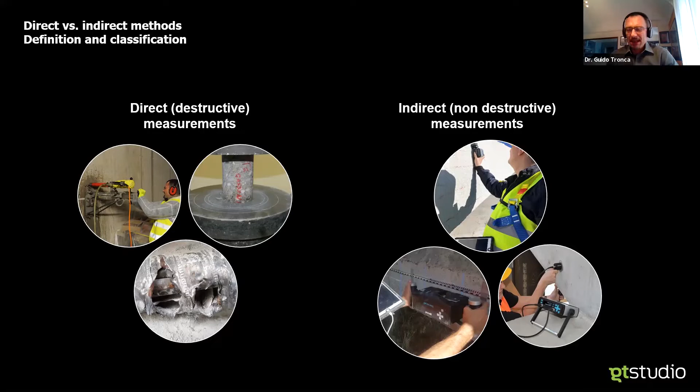Old school method for finding reinforcement and PT ducts: breaking, visual inspection. Other ways of doing it. Is there a better way? Are they outdated? The answer is no, basically. There's no point in being a partisan of one team or the other. The key point for a professional, for an inspector, is the best combination of both in order to extract the maximum amount of information.

So if I should point out some key features of one family versus the other, I'd say that a direct traditional measurement measures directly the quantity I'm interested in, and normally I destroy a sample for doing that. While the non-destructive or indirect approach focuses on measuring a related quantity somehow correlated with what I'm looking for.

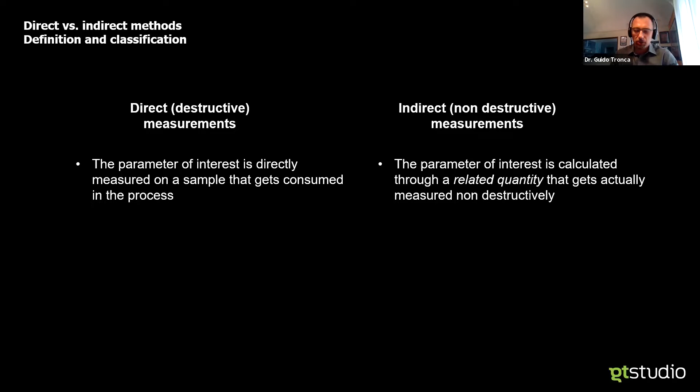By definition, a direct measurement is typically certain, calibrated. It can have a certificate with a huge number of decimals behind it, making you certain that the quantity is measured. While with non-destructive testing, we are rather dealing with qualitative or comparative information.

A key limitation is that if I test one point, if I break open one location, I have a full, perfect insight of that specific point. How can I be sure to extend that insight to the whole structure? That is the role of NDT.

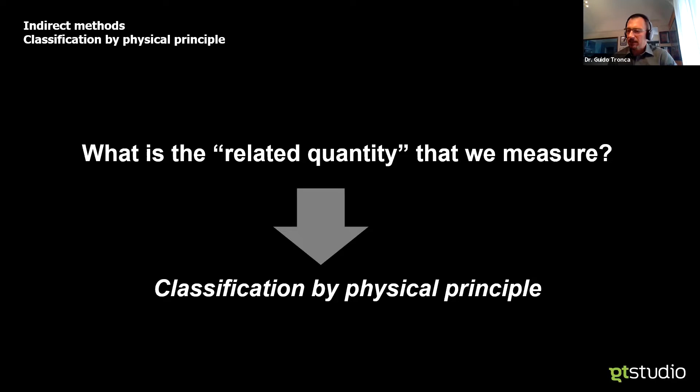We mentioned that there is generally some related quantity that we measure, and that basically defines the measuring principle of each measurement. So as a short classification by physical principle, I just prepared a couple of qualitative slides.

Electromagnetic waves analysis is a very technical term, but it collects a number of different measurements, among which the first and most important is visual inspection. A good inspector keeps his eyes open; you have to really provide a subjective judgment on a location. If I shift myself from the very narrow window of wavelength that my eye allows, I notice I can shift toward X-ray analysis or lower frequencies.

I'll enjoy thermal camera and infrared inspection, or even lower frequency with GPR. All have this basic principle in common. If I keep an eye on the sonic waves, there's a whole world of testing that can be done.

And we concrete guys are strongly related to the metal guys, who use similar principles with very high frequencies. You play by seeing how your body reacts and responds to a sonic impulse. It can be very high frequency, or this average frequency that is our bread and butter in concrete when we measure ultrasonic pulse velocity, cross-hole testing, pulse-echo, and so on.

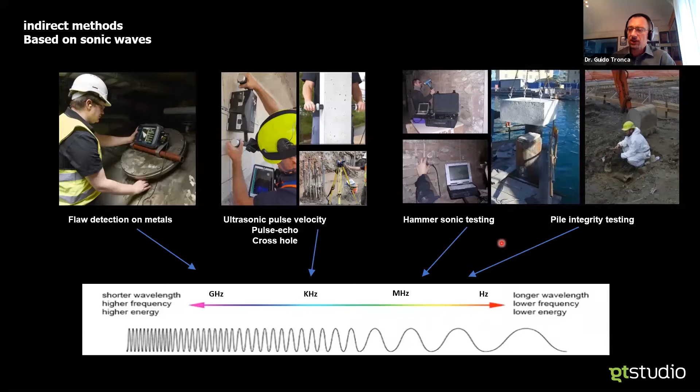Other methods are typically electrical in nature, and we'll see that especially for corrosion. Electrical processes need electrical tools. So this is our electrical toolbox, where we find rebar location, induce currents, or measure potential, resistivity, polarization resistance — electrical quantities.

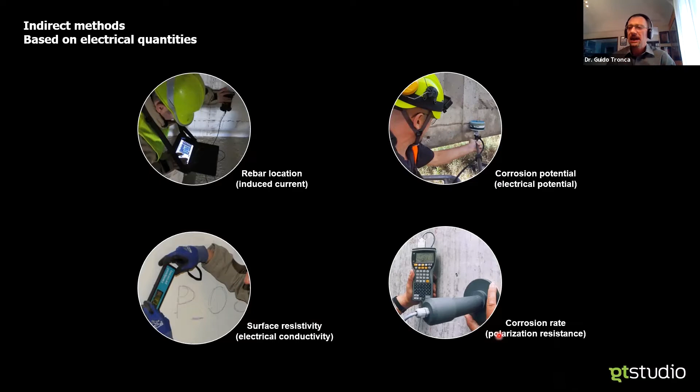And in the last box, I put the mechanical quantities. I can measure rebound, the hardness of a structure, or even for metal, measure the amount of energy that is transferred into the body.

So we're measuring a rebound distance or rebound velocity, or we can measure the amount of penetration a specific probe can reach when projected with a given energy into the surface, or the force needed to pull out a specific insert. In all these cases, we're dealing with a mechanical quantity related to the final quantity — concrete strength, in this case — to be measured.

Okay, so this is just a warm-up, but probably more interesting is a classification by application. Now we'll be picking up from the different boxes of physical principles the tools we need for our specific purposes today.

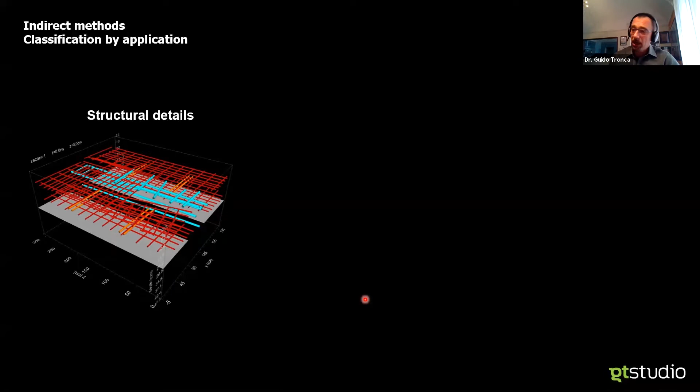Specific purposes we'll be talking about are structural detail, in broad terms, for highlighting geometry and even embedded objects and defects of a given structure. A key point for a structural engineer is the estimation of concrete strength, and for durability and service life estimate of a structure, the corrosion investigation. Let's dive in with the structural — some of the measurements we'll be talking about today.

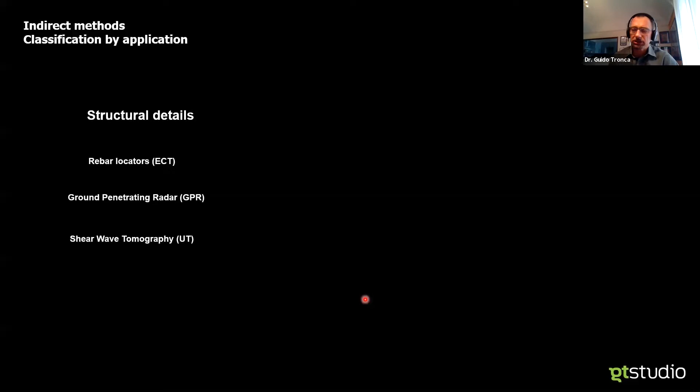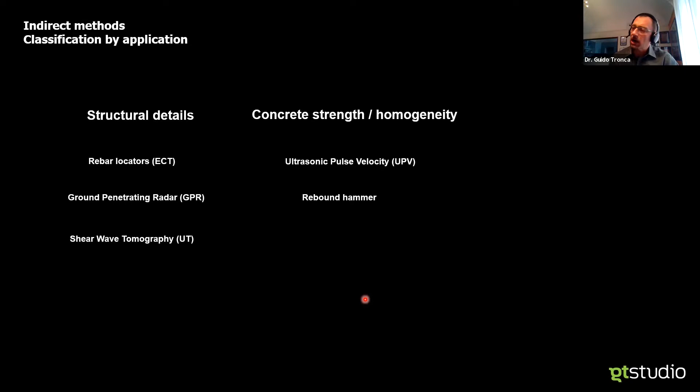So we'll be talking about rebar location, ground penetrating radar, and shear wave tomography for structural details. Then I picked the two most important ones at global level for concrete strength, which are hammer testing and ultrasonic pulse velocity, and some mention of the electrical method for corrosion.

So let's start with the imaging technique, structural detail assessment. All these techniques provide an image, a visual insight of what's inside an object. Let's start with a general overview of all three of them.

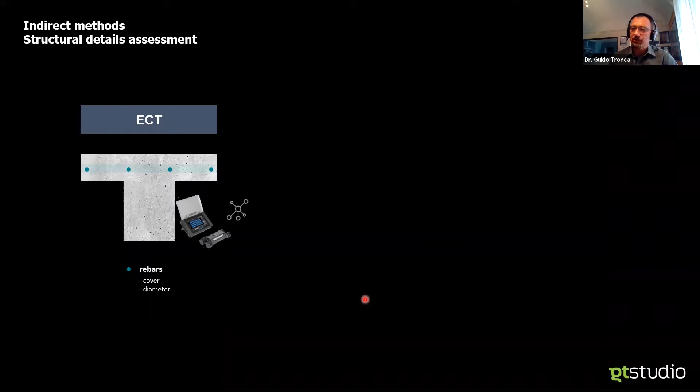Rebar location is the gold standard for steel rebars, typically accepted for measuring accurately cover and estimating diameters. We'll be touching the ground penetrating radar, its key feature being the most versatile locator. It extends locating capabilities not only to steel objects, but to metal, plastic, and voids also. And the most recent technique is ultrasonic tomography, UT, a very specific application, very promising and ramping up in the world of non-destructive testing.

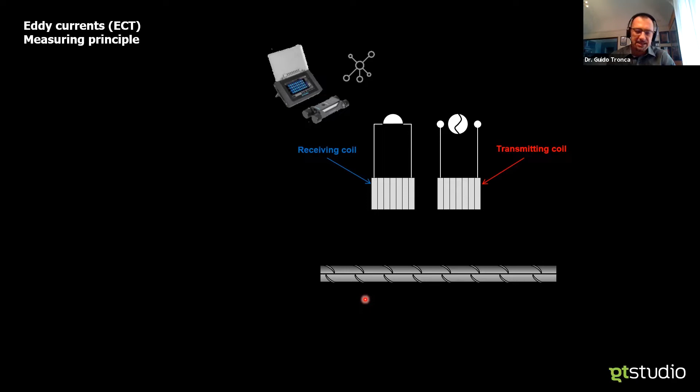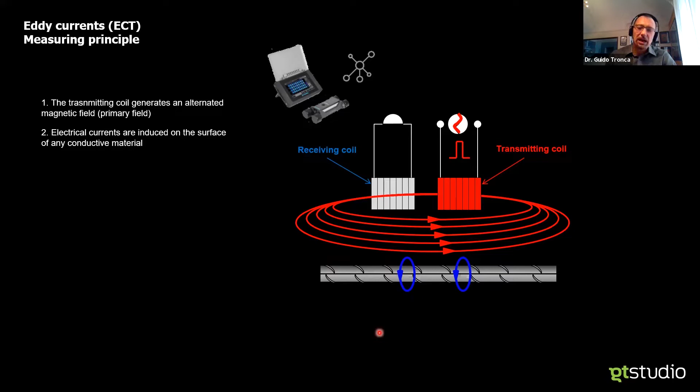A very short insight into the measuring principle of any rebar locator. All manufacturers have different arrangements of the coils used to investigate steel, but the basic principle relies on a transmitting coil where current is driven to generate a magnetic field, which induces surface currents onto any electrical conductive body. So we are specifically dealing with conductive bodies, specifically ferromagnetic conductive bodies.

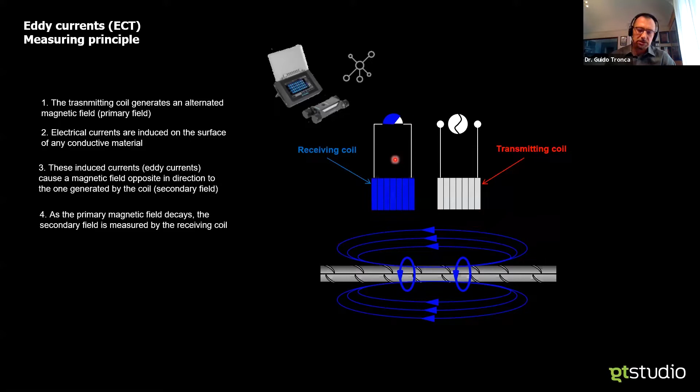When an electrical current runs over an elongated object, a secondary magnetic field is generated. This is the quantity, in terms of voltage related to the induced magnetic field, that is measured. Quite a complicated measuring principle, but what we care about as NDT users is that this measured energy is related to concrete cover and rebar size, and both can be separately calculated.

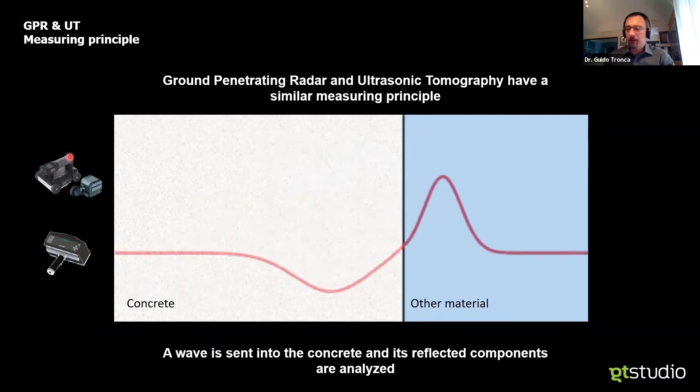If we move to the other two partners of concrete imaging, both have a similar acting principle. They are both based on shooting an impulse into the concrete and listening to its reflected component. The main difference is that a ground penetrating radar will shoot an electromagnetic wave into the concrete, while the ultrasonic tomograph will induce a sonic shear wave impulse. These two kinds of energies respond differently when they meet different interfaces.

The key point to remember, which has a dramatic effect on the strength and limitation of each, is that when I shoot an electromagnetic wave, it will partly pass a concrete-air interface, while it will totally bounce against a concrete-steel interface. When I play with ultrasound, I have to expect an inverse behavior: all energy is reflected against an air interface, and part of the energy will pass through a concrete-steel interface. Now let's keep in mind that the amount of information I extract is related to the component that bounces back.

That brings us to the main differences between the two. Steel is the natural target for GPR, hence it will be extremely accurate in defining every steel object, not only but mainly steel. Air is not a barrier for GPR, hence we can investigate through air. It's a good thing, we can have our instrument rolling on wheels. If I have a small air interface, I can bring my insight further.

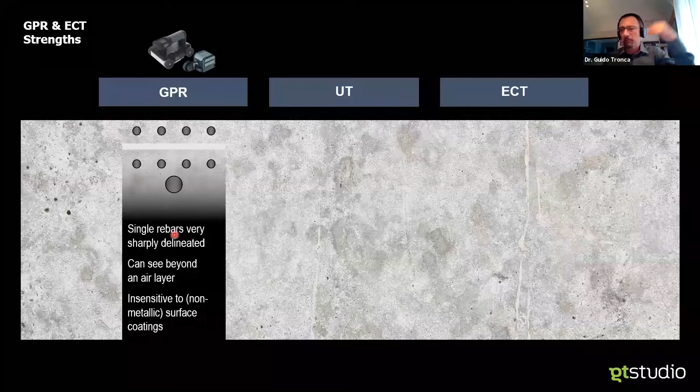If I play with ultrasound, we saw that this kind of energy, ultrasonic waves, tends to pass through steel. So it won't be as sharp on steel, but it will allow my examination to go further, even into dense rebar arrangements. You can even go past a metal plate and look for an interface behind it. Its natural target is air, so everything related to air—maybe the geometrical end of the object, maybe the smallest delamination, an air pocket, a honeycomb—it will be a natural target for ultrasound.

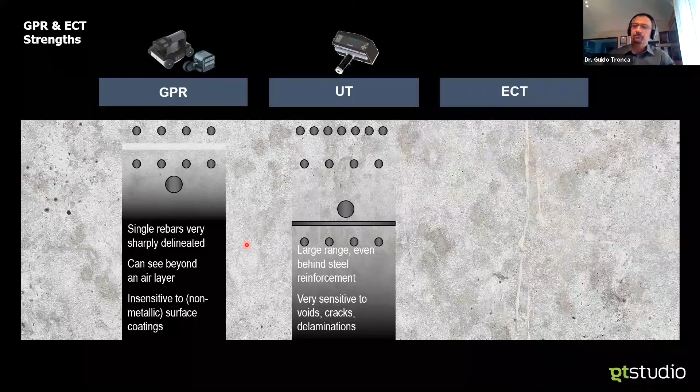For all these kinds of techniques, let's keep in mind that what I see best will make me blind behind—this will reflect later. Eddy current testing has the great feature of only looking at rebars, so it's totally insensitive to the material type. Typically, when dealing with GPR or pulse velocity, we have to take into account the material properties: is it wet, is it porous, how fast is the wave there? None of those complications exist when I simply use a rebar locator, because I only measure a specific target.

Concrete cover can be very precise, especially with modern instruments with compensation algorithms, and in fact it is broadly accepted as the number one methodology for verifying concrete cover. As state of the art today, it is the only approach I can have for estimating rebar size under lucky circumstances—not under all scenarios, but if there's one method that can guess a rebar size, it's an eddy current based rebar locator.

Now let's turn the medal and look at the other side. We said that GPR is a sniper for steel. If there is too much steel, I will easily not pass that barrier, and my information will stop. The energy will be highly absorbed by heavily congested reinforcement.

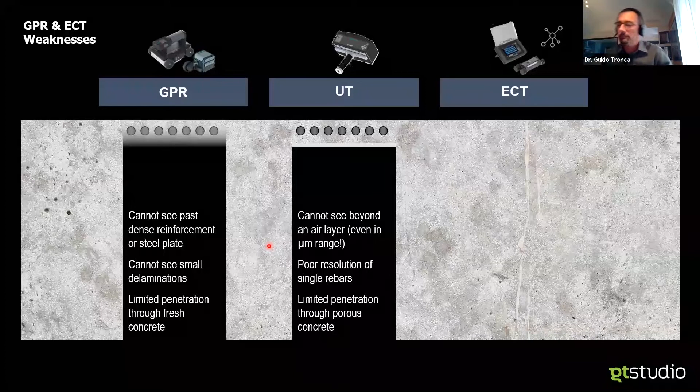Eddy current is basically limited in depth. We'll see some examples, but while high frequency GPR can reach up to 60, 70 cm of penetration, ultrasound can go past 1.5 meters, couple of meters in good concrete. With eddy current testing, we are very accurate, but we are talking about centimeters, 10, 15 cm, and only the first mesh of reinforcement.

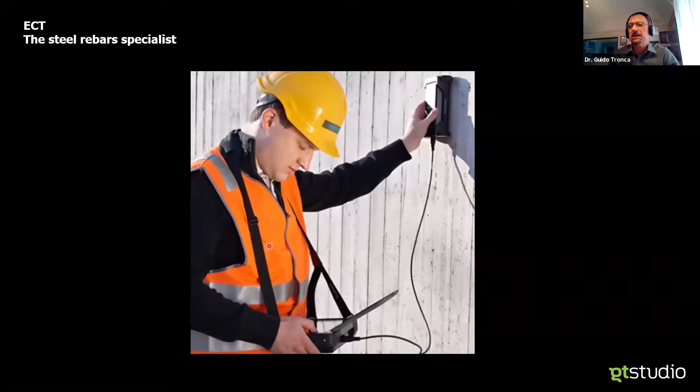Okay, let's see some of this methodology in action, and let's start with the first in order of appearance, something that's been on the market since the early 70s, I would say. No comparison between what those instruments could do then and what they can do now, but still, it's very often the number one instrument that every inspector has in its arsenal.

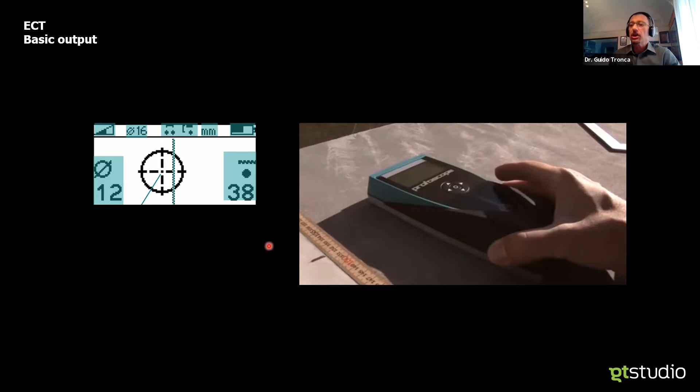The very basic output, you can find in entry-level instruments, is that when moved on the surface, they can easily locate the rebars, providing the location and not only spot measurement of a given cover and spot measurement of a rebar size. This is the entry-level rebar location that can be used.

And it is a central activity in all NDT inspection. Why? Because a key point of all NDT and traditional testing inspection is that you always want to know where the rebars are, either because you want to measure them or you simply want to avoid them.

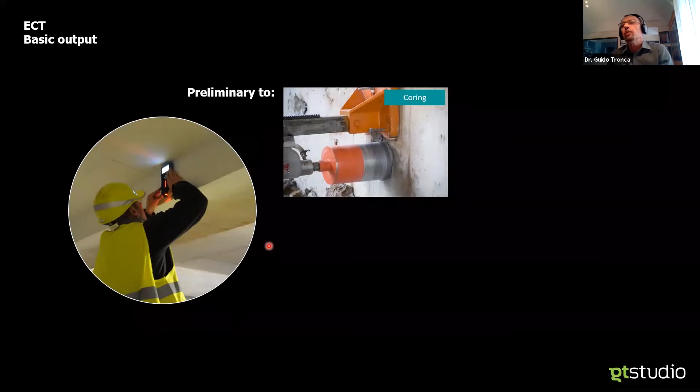Of course, you want to avoid them when coring and cutting the concrete, but you also want to avoid the effect they could have on the measurement when performing other kinds of NDT measurements, such as rebound hammer, such as ultrasound that is affected by the presence of rebars, extraction testing, you name it. Whatever you do on site with NDT, you'll always have to add at least a basic rebar locator.

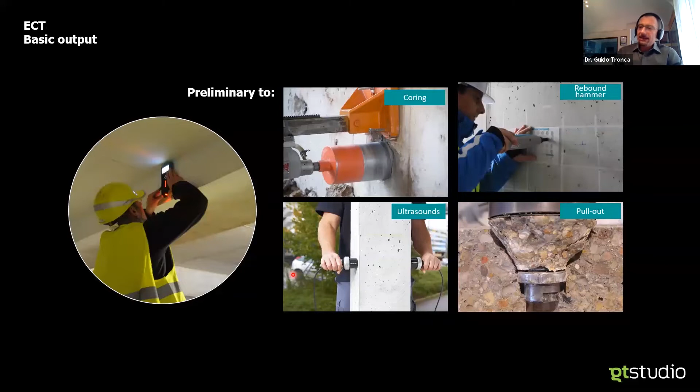But especially if we focus on high performance instruments, and let's assume you use an instrument with a wheel, like the profometer, for example, then you will see its real full potential for conformity check for cover. That is a mandatory check in many agencies or many general contractors. You want to check that the rebars have sufficient cover.

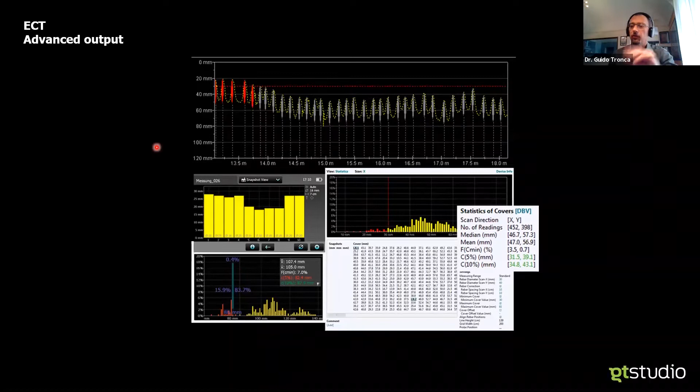Perfect. The instrument is optimized for running along huge paths, collecting the right cover, and performing on board or on PC the related statistics analysis, which enables the final user to say my cover is compliant with the drawn specification, or we have non-conformities on specific spots.

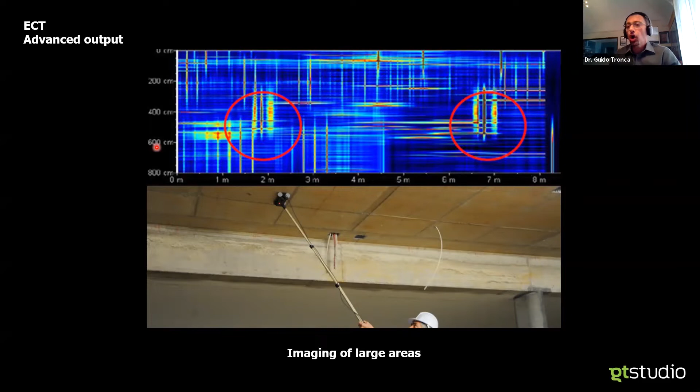These are typical reports that an NDT company could deliver when asked to perform rebar location on single objects: color-coded mapping in terms of cover or diameter. Just to give an overview of this.

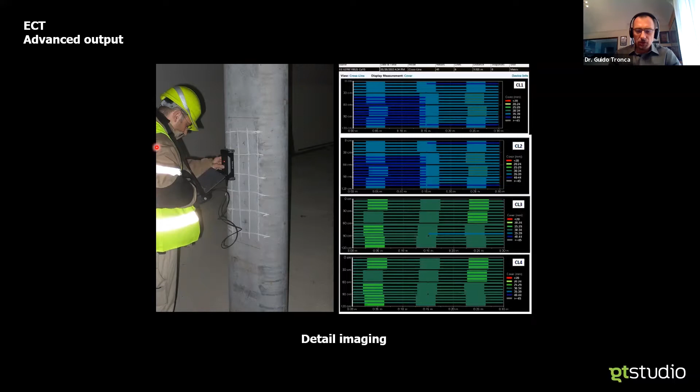But let's move one step further in time, and as years passed, we, the concrete guys, the concrete NDT world, stole a methodology that was basically born for soil investigation, hence the ground penetrating radar. If I should label it, the GPR is the ultimate locator.

Let's understand very shortly what you have in your hand when you use that. You have a device that you will roll onto a surface along a path. It will send its impulse while running, and it will measure an arrival time of each reflection. The measuring time or measuring distance, once we assume a given velocity, is then represented into an image shape.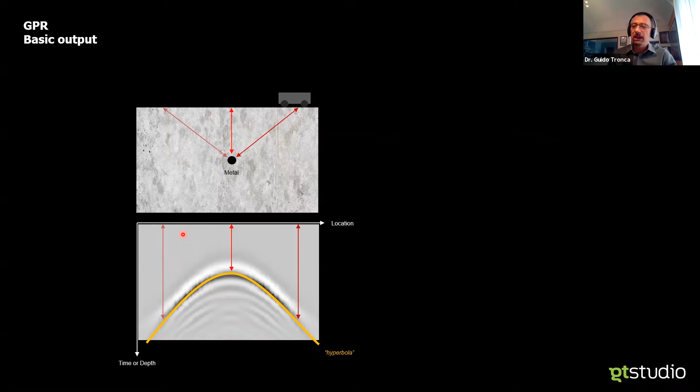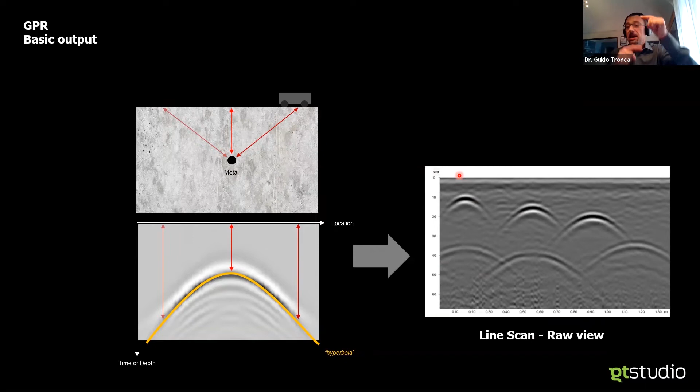So with GPR, we move from the simple numbers of a rebar locator to a real image that is typically in its native raw shape, recognizable by hyperbola-shaped objects, just related to the fact that the impulse is continuously measured. And also, it's the key reason why we can see multiple layers of objects.

Okay, this was a very simple case. Let's take a look at a real case of a reinforced concrete slab.

There are a few meters of scan. We can see the first layer of reinforcement, every single rebar in shape of a hyperbola, and the second layer of reinforcement at a given depth. The bottom of the slab, this was a 35 cm slab, and if I focus my sight on the bottom part, I can also see the supporting beam.

This scan I wanted just to use to give a first view of the very basic processing that is very common in the GPR world and is fully supported in the PROCEQ app, which is the migration. We basically take into account the velocity of the wave into the concrete, and we collapse those hyperbolic views into realistic dots.

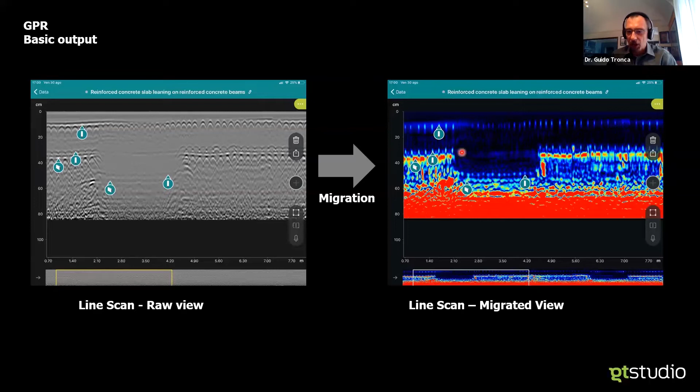So a migrated view is the closest thing to a real section of the object that I'm measuring. I can see dots where the rebars are, top of the slab, bottom of the slab, bottom of the beam, and all the shape of the element I'm investigating. But we can do much more than that.

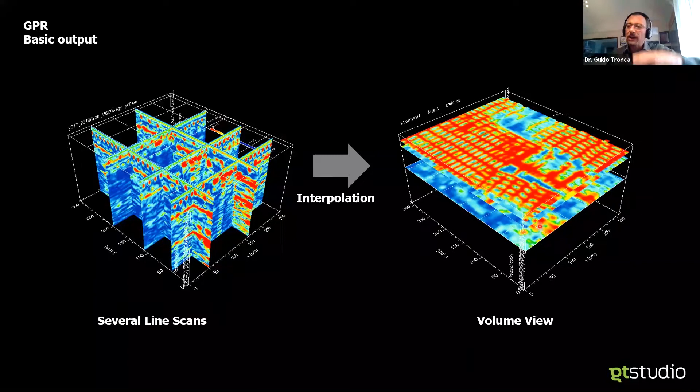Let's assume that we measure a number of those scans along typically longitudinal, parallel, and orthogonal scans. If I process those data combined and interpolate the empty spaces, then I can get to a full volume view that is typically sliced in time. So I move from a distance versus depth view to a more intelligible XY view at whatever depth I want to reach. And this was made fully available by PROCEQ.

This is a kind of processing that's been around for ages now, but I have to admit that PROCEQ was the first one to bring it and make it onto a very usable interface.

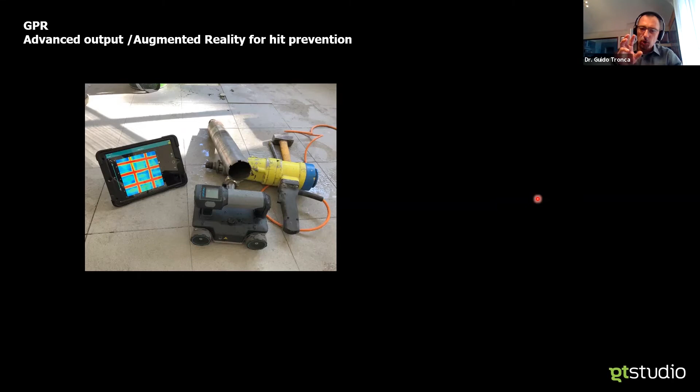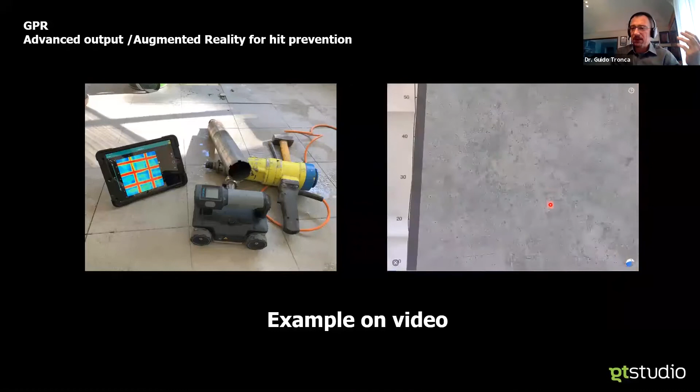So on purpose, I focus on this very typical application, which is hit prevention by means of GPR. You can see in this fast forward motion that if I scan a small area, the typical 60 by 60 is a good default, I can immediately have an overview, even if it's maybe complicated. In this case it wasn't crucial to estimate all the rebars and the exact reinforcement, but basically to avoid those. So let's collect all the scans that we need.

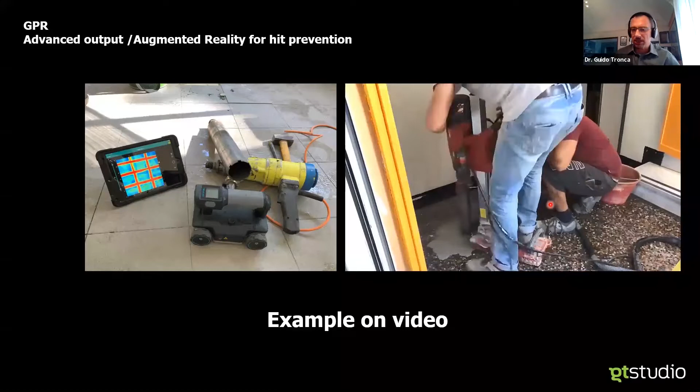Let's focus on the surface itself. Every strong reflector can be assumed to be a steel rebar, and within a reasonable time, I can estimate the right spot to drill a core. That is a very simple example where very high level technology, what used to be considered only high level technology, is really at hand for very practical applications, such as in this case, we can see a successful coring.

So I guess that was confirmed on site. Exactly. So good, successful hit prevention, simple case.

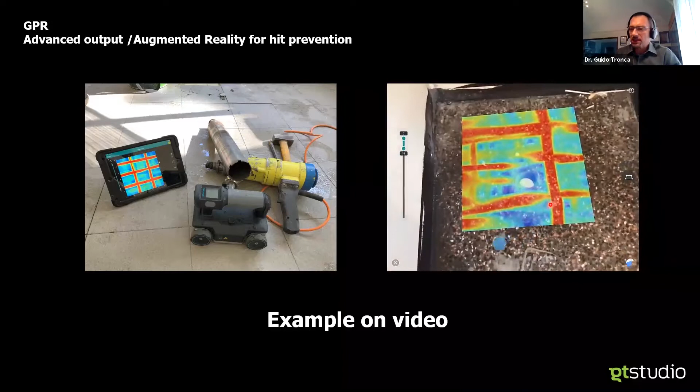Okay, moving on to just another short example of a more complex structure. This investigation was carried out on an old building that underwent rehabilitation. You could really see a mix of old typical structures such as masonry vault and arch that were later reinforced on some portions by metal reinforcement.

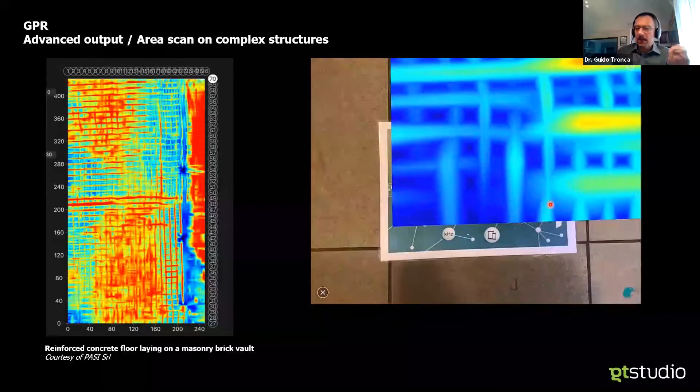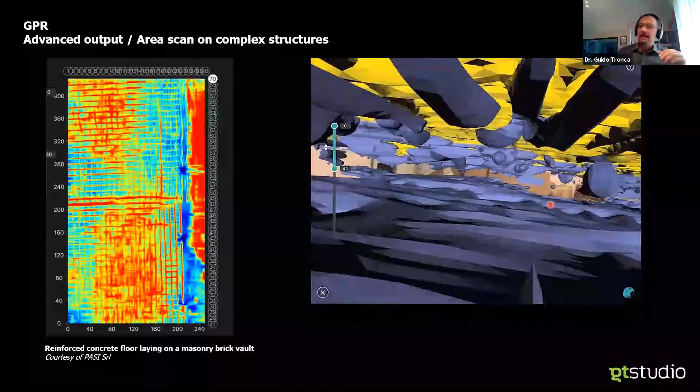This on the left is just a snapshot at the given depth. The full insight of the whole slab can be gathered by, in this case, a flexible area, so several meters were scanned. And in this case, the owner of the construction could really directly verify where there was the yellow upper metal reinforcement, and where the existing masonry walls and arches were in different parts of the building.

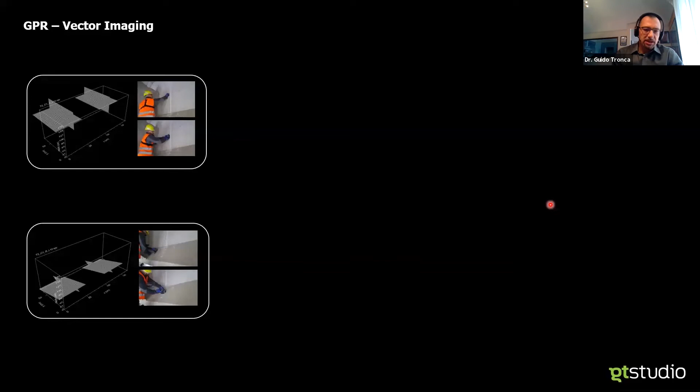So, in a couple of examples to touch on typical applications, something a little bit more related to infrastructures, just to give an idea that advanced processing can be done even outside the app. There's a software suite that is recently being sold also by PROCEQ. Just to give the idea that under infrastructures, the definition of structural details not only covers rebars, but often and most importantly, post-tensioning ducts.

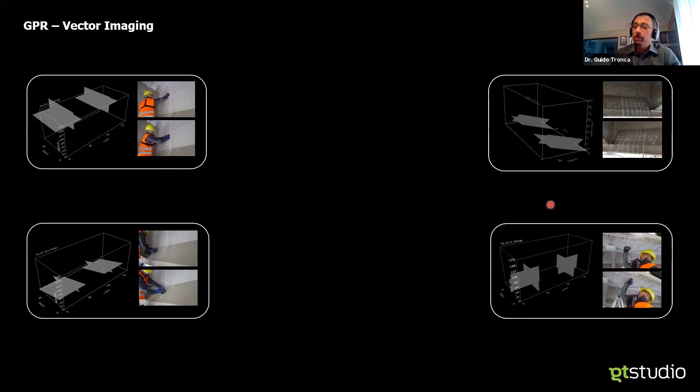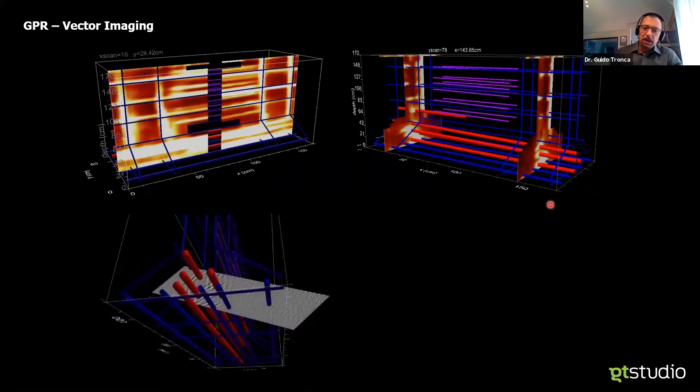Once we combine all the scans, even in oddly shaped or complex geometries, we can have these volume views that, once sliced, can really provide insight into the traditional reinforcement and PT ducts. Here's an example of the new school slicing under all possible planes, and the old school detection with raw data and deliverables immediately available, or in CAD format.

Okay, so much for GPR, and let's look at its successor or its complementary relative.

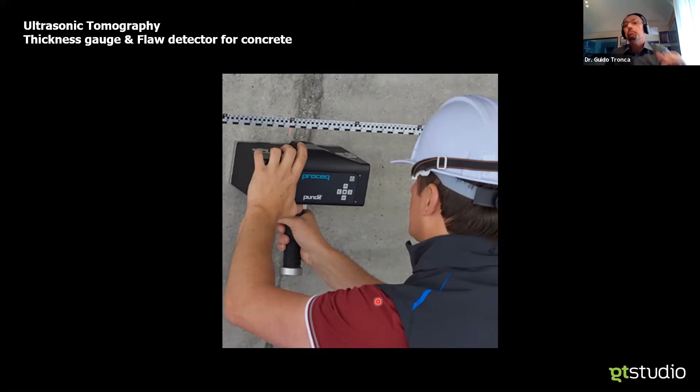Some of you may already be familiar with some metal testing. Ultrasound in metal testing is often labeled as thickness gauge and flaw detector. In the past decade, the thickness gauge and the flaw detector became available for concrete. Hence, we have this tool.

The first application in order of appearance is the pure thickness measurement. This is the first application in the world that currently has a specific guideline. The German Transportation Agency included ultrasonic tomography for checking the lining, the inner lining of tunnels. So this, in the shape of depth mapping, is one key role and one of the easiest tasks to perform with ultrasonic pulse echo tomography.

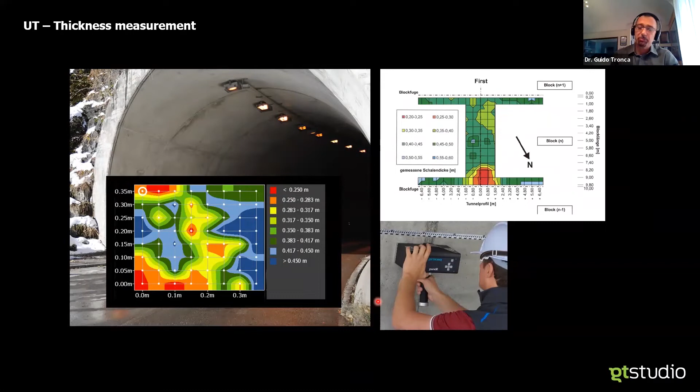Similar feature for a small air pocket. It was an induced simulated honeycombing. Quite a difficult task even for GPR, especially if it's small dimensions. You can see that the smallest air interface will reflect sharply on the profile, shielding locally the back wall reflection from one defect, which becomes a very easy target to detect.

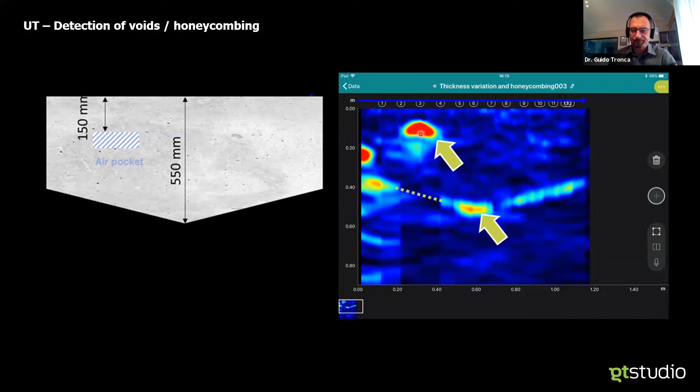Last, but probably among the most important applications of PROCEQ, is the detection of grouting defects in PT ducts. We know that the number one reason for failure of PT ducts in existing structures is corrosion. Strands are well protected in a properly injected duct. But whenever, for manufacturing reasons, the quality of injection is not perfect, we open the door for water to filter in and start eroding the duct. The dramatic effect is an invisible and unannounced collapse risk.

If I look at these ducts with GPR, and we saw a couple of slides before that PT ducts are very well defined by GPR, the amount of steel is so relevant that it will make the GPR blind for any air inside. The only device having a chance not to be blinded so much by steel, and to chase after the air portion inside the duct, is actually the PROCEQ.

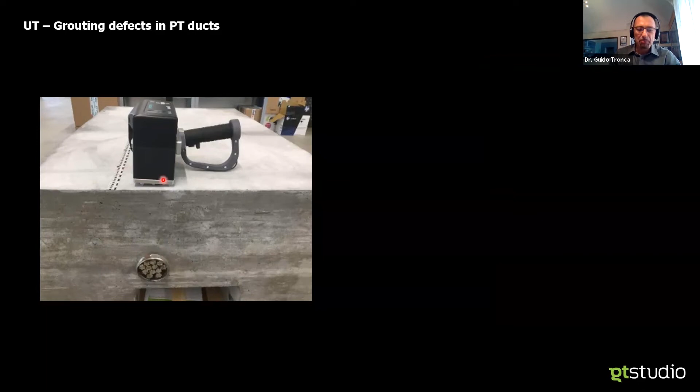Let's look at a mock-up case where this partially injected duct was tested inside the lab by means of a line scan, meaning the probe was moved along the axis of the duct, collecting an image that highlights the horizontal reflection of the duct, highlighting a strong portion, because a strong reflection for PROCEQ is air. So we see likelihood of air here, and very likely a properly injected grout PT duct here.

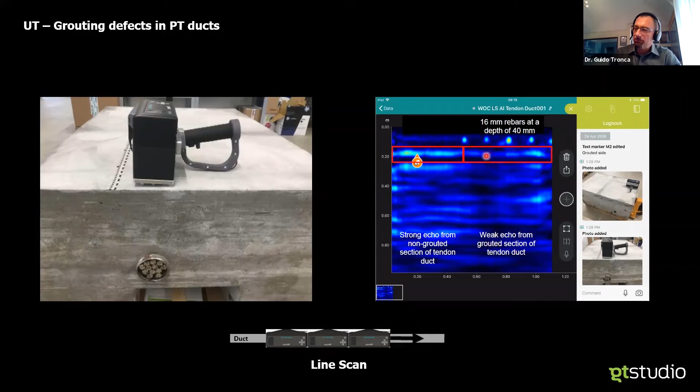Now, when bringing this on-site, it is quite often preferable to perform the so-called stripe scan, so you are a little more sure of centering on your duct through several measurements, collecting an aerial overview, a time-slice view, just like GPR did. I collect a number of single scans here, and the app puts together the image, and then I decide to look at this image at a given depth—the depth where the duct is. It will provide a more reliable overview of areas where I see a weak reflection of the duct.

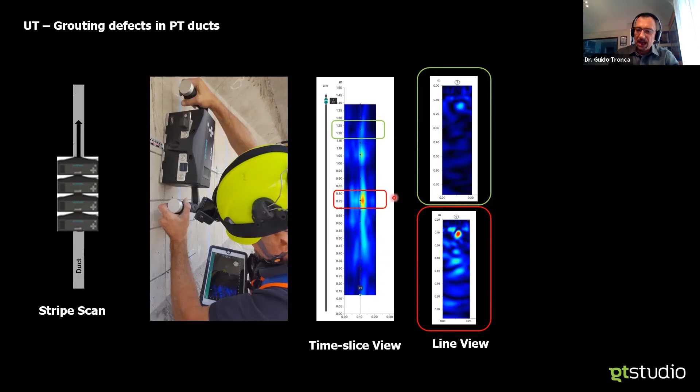In this green portion, I see this distance here, which is the same distance that I read here, versus a given depth. I see that I have a duct at around 12 cm. If I focus on this area, I see that a sharp reflection is confirmed in the line scan. So if I put together all this information, I will pinpoint the areas of high intensity, and those will be the ones where direct verification will be done.

This is a real case where a visual inspection was performed and lack of injection was confirmed. Again, just to jump back to slide number one, it's not that you give up the visual inspection because you own this powerful technological tool. You use the tool to verify the opening at the most representative locations.

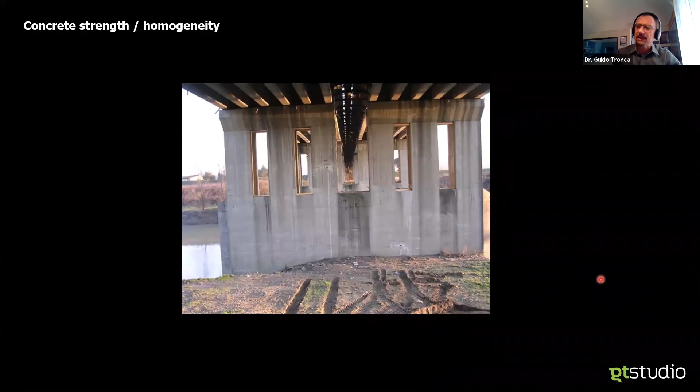Okay, so much for imaging. Just a short overview of concrete strength and homogeneity calculation. I won't dive into the technical details of the tools, but I'll pick up the two champions for this purpose: ultrasonic pulse velocity, UPV, and rebound hammer.

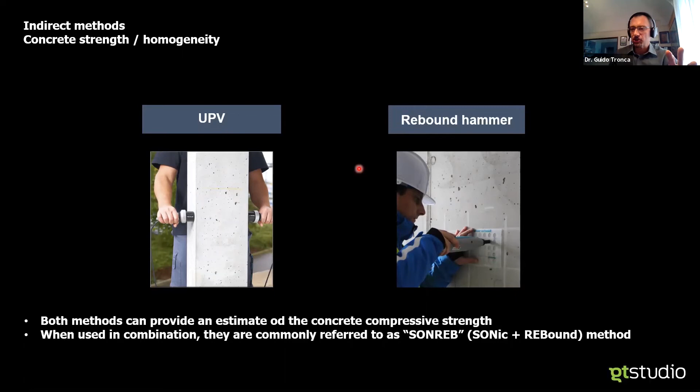Both methods can provide an estimate of concrete compressive strength. As a matter of fact, rebound hammer was the number one historical methodology for concrete strength, dated back to the 60s. When used in combination, they are normally referred to as SONREB, sonic and rebound testing. These are quite inexpensive and affordable technologies, covering probably 80 to 90% of typical applications on existing structures, so very abundant on the market.

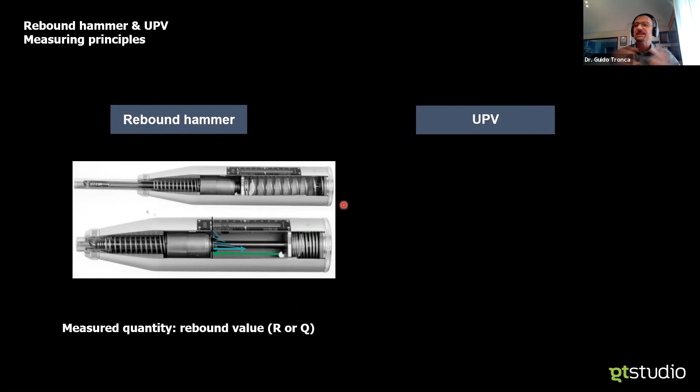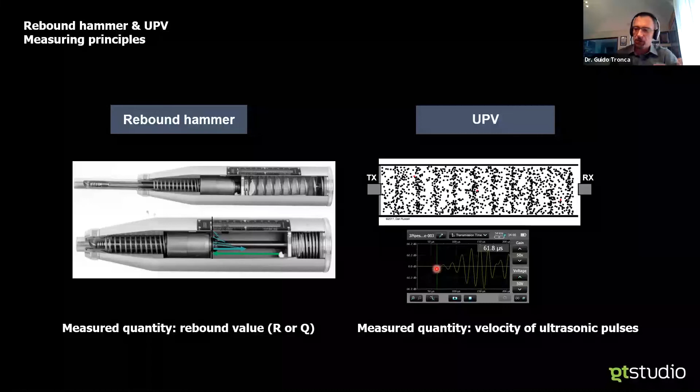Rebound hammer: basically the measured quantity is a distance or velocity of a mass that is projected on the surface. The tougher the concrete, the higher the energy reflected. UPV, ultrasonic pulse velocity: I put two transducers across the surface and measure the transit time of that impulse, typically on an oscilloscope or into a digital interface as it's done today.

Okay, so much for details, no time today for that, but the key point affecting all users in the community is: what do I do with this rebound value or velocity value? There are two levels of approach. The first is just enjoying qualitative or comparative information. The second is going back to old school coring and combining the info from both techniques for providing an accurate strength measurement.

Case 1: I only measure, in this example, ultrasonic pulse velocity. I can go back to literature books, I can Google up, and I'll find enough qualitative statements. That can be enough, depending on the purpose, and especially it enables me to make statements about differences in the structure. Watch out guys, the first floor is for sure a different cast than all the other floors because the velocity is awfully low. Nothing wrong with qualitative information, much better than wrong quantitative information.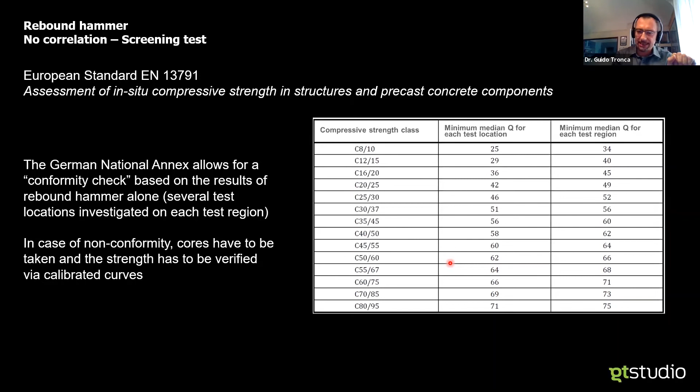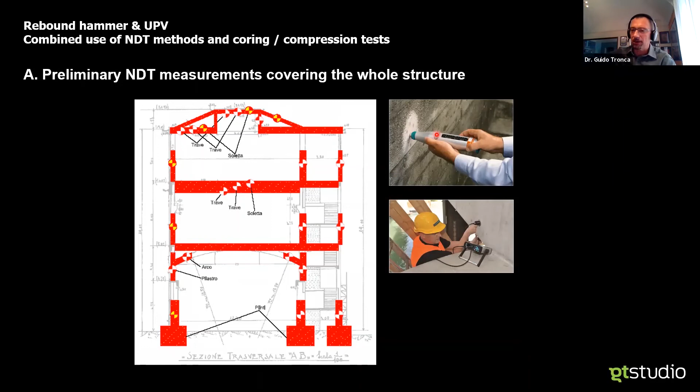Now, the key point generally for proper testing, case B that we mentioned, is let's use every tool at its best. Let's use NDT as a preliminary technique for providing, at low cost and in fast time, information on a large number of elements, and let's leave the coring machine in the truck for now.

Once I've collected enough data, I have reasons to decide, okay, in this building, this hospital, this structure, I will extract, let's say, 5 cores. But now I'm no more blind. If I didn't have this overview of rebound value and sonic velocity, and just trusted traditional testing, I might have randomly tested only good portions of the structure, averaged my results, and come to totally wrong conclusions. Or the contrary, I could have hit low outliers and classified the structure as needing renovation with huge investment.

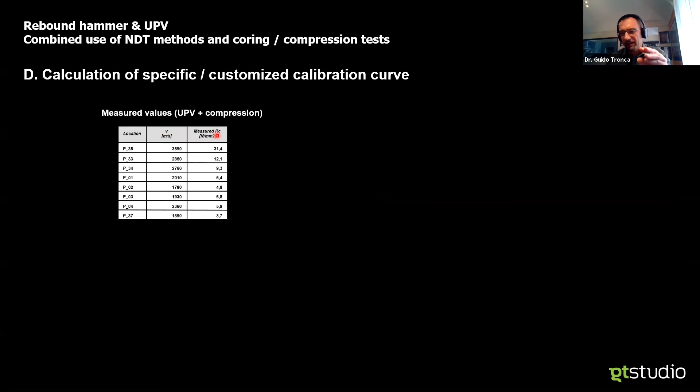Now I have selected spots for calibration. I will go on site, prescribe a very limited number of direct sampling, and have the tools. This is just a generic chart, but if I have pairs of locations where both the non-destructive and destructive parameters are measured, I can go to the Excel sheet I can find and obtain a given regression curve. Once I have that curve, at the cost of a small number of cores, I can recalculate the actual strength that I can use for characteristic strength assessment.

That is the idea of the proper non-destructive versus traditional way of testing.

This was a very simple sheet, hyperbolic curve. Other curves are possible. If I move into the SONREB approach, I might have to deal with variables with strength as a function of two variables.

No reason to panic. Nowadays, even if you're not a MATLAB expert or an Origin practitioner, there are standard tools that can be used, and I checked that PROCEQ itself can support calculation of the curves and the handling of those curves into the instrument. So once I have a calibrated curve, I can go straight on site with my Pundit or my rebound hammer and provide an immediate answer in terms of strength.

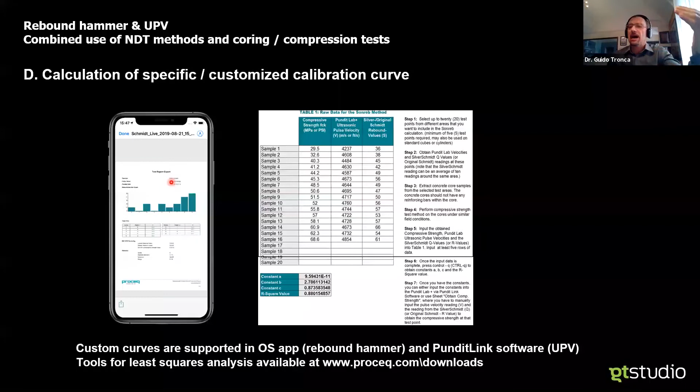Now, a couple of words on the last box that I kept. Not last in terms of importance, quite the contrary. Just a couple of words.

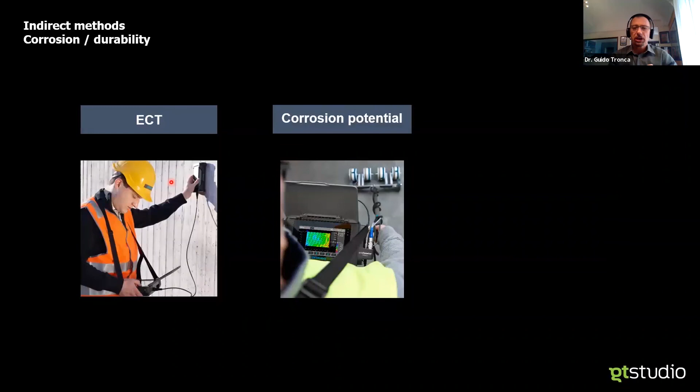Corrosion is the number one cause of weathering, decay, and failure of reinforced concrete structures. Concrete in itself could be almost eternal. Reinforced concrete is not. Why? Because we will basically touch on three key measurements. I'm not saying those are the only ones.

So why these three methods? I tried to present it in the most compact way. This is what happens when corrosion is ongoing into the concrete. Basically, we see an electrochemical cell. Iron gets corroded by the presence of oxygen, and we see current moving along the rebars and inside the concrete.

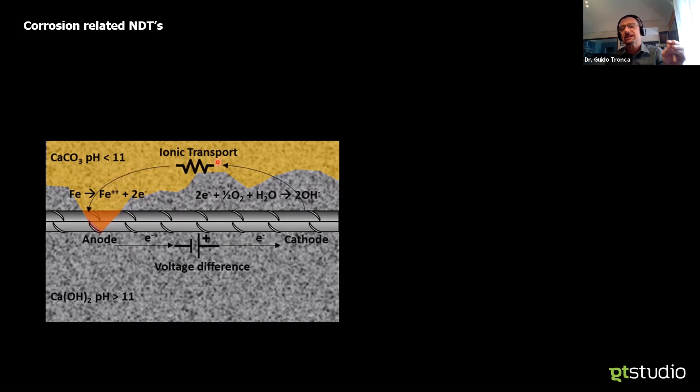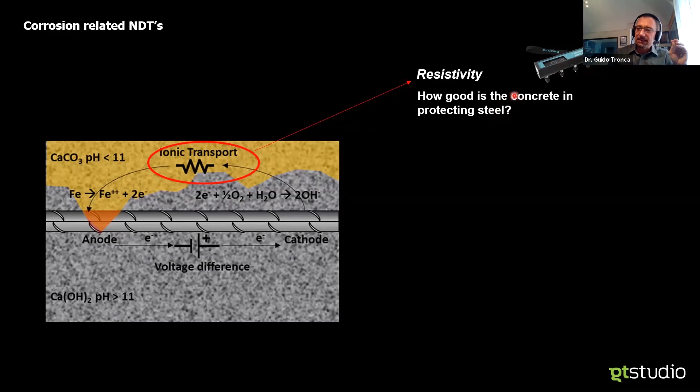So if we accept this scheme, we see ionic transportation in the concrete, and resistivity is the answer to how good the concrete is at protecting steel. Well, a conductive concrete is not protective, a resistive concrete is.

How much physical protection is my concrete providing? Well, that is the reason cover meters were invented, and probably the reason why your engineers put down a specific minimum cover value, because we know that aggressive agents will permeate, for example, in 10 years will reach the rebars if the cover is 25 mm. If I put a cover of 45, it will last probably 35 years.

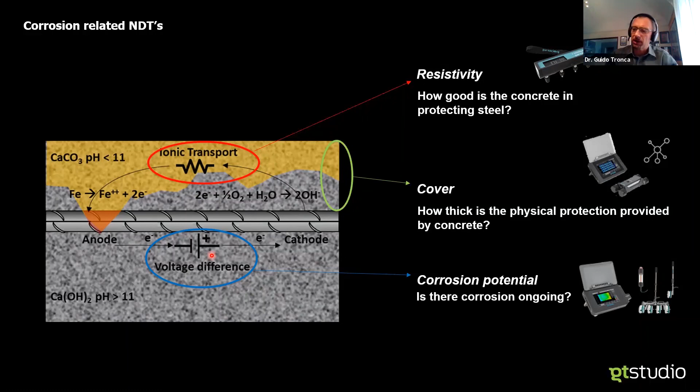And last, there's a voltage difference. We have the tool for chasing after this voltage difference on the surface. So we already covered, or at least mentioned, the cover measurement as the eddy current locator as number one cover measurement. Let's touch on a couple of points on resistivity.

Electrical resistivity has a total dual approach. It is performed both in the lab, on the same samples typically used for compressive strength, which nowadays are also being tested for resistivity. The market was led by AASHTO, an American standard, ASTM followed, and a European standard is being worked on. So be prepared, guys, this will be something that whoever deals with testing, even lab testing of materials, will have to take into consideration.

In this case, resistivity means how good the concrete is at protecting and avoiding especially chloride ion penetration. That is one aspect of resistivity. The other is, I'm not dealing with a new structure being cast today, I'm dealing with an old bridge, an old structure. I can use this tool to go on site and evaluate and classify areas where the concrete is still in good, or no longer in good, conditions for protecting the steel. This is the dual approach of resistivity.

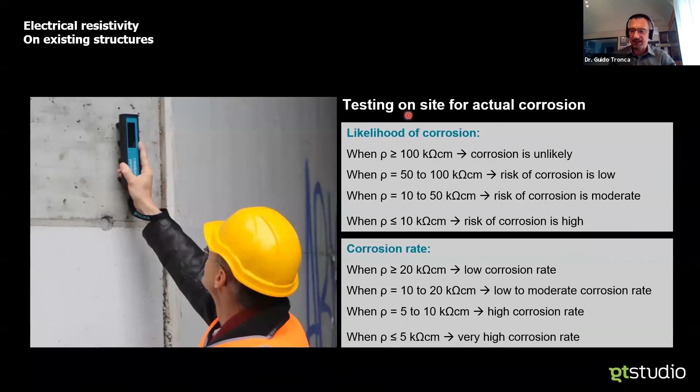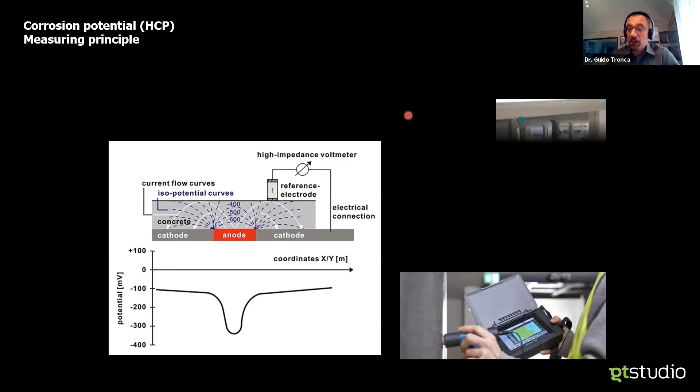I would say the number one technique for global use is the half cell potential, which is the only one telling me, hey, today there is some corrosion ongoing in specific spots. The physical principle behind it is that I chase after low potential spots indicative of ongoing corrosion, done through a traditional electrical circuit where a hand-held electrode or a wheel electrode is rolled onto the surface. Again, this will never totally avoid traditional opening and visual inspection, but especially on large structures, it will provide a mapping of areas at risk.

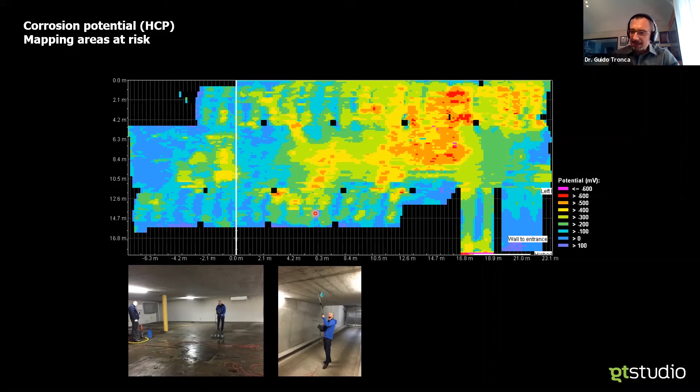In this case, you can see a color-coded map obtained by scanning with a wheel electrode onto a parking slab. Once these data are processed, there are a couple of statistical tricks based on the statistical distribution. It enables the user to provide the final customer, the contractor, with red, green, and yellow areas that are really maps of priorities. Red area: go, open, and check, and very likely start putting some money into account for repairing. Green areas: you can save your money, sir, for today. Let's keep an eye and monitor this bridge or tunnel lining for the next round.